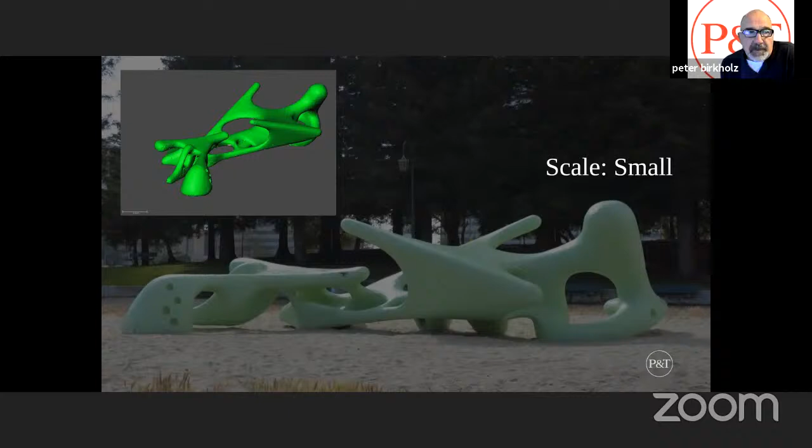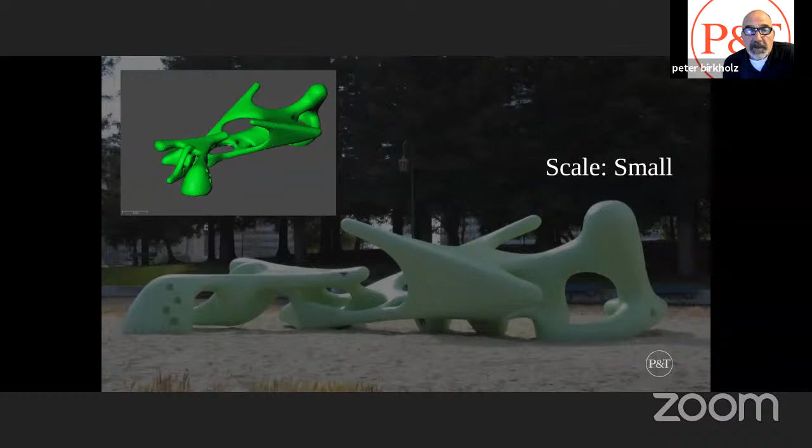scan to BIM. We've done this on small projects, like here's a project in Oakland that the firm did pro bono, a budget of probably like $50,000 to rehabilitate this historic late 1950s children's play structure. And we scanned this to document, and we're going to actually take this scan and output it to do 3D prints that they can use to fundraise for the project. So kind of a unique use of the scanning technology.

On a larger scale, we're part of a team for the California State Capitol. To the left here, you see the rotunda of the California Capitol and the historic West Wing. On the right side of the screen is the annex, which is going to be demolished and rebuilt. We're a partner with SOM on this, and this is a $500 million project, and we're using scanning technology to document the existing building. The addition is a 1950s addition. The original building was built in the beginning of the century.

And in between these two buildings is an interstitial space that we don't really have very good access to. And so one of the things we're using the scanning technology for is to stick cameras up in this interstitial space to scan to determine what the utilities are and what the condition of the facade is.

Page and Turnbull has been using BIM for the last, say, 15 years. And this was an early project, 2007, 2008, that we were working on with another local architect. This is the Exploratorium Museum at Pier 15, and it's the first zero net energy museum in the US. And how we did it back then was, you see to the upper left, the Port of San Francisco owned the property, and they were the designers of this in 1906.

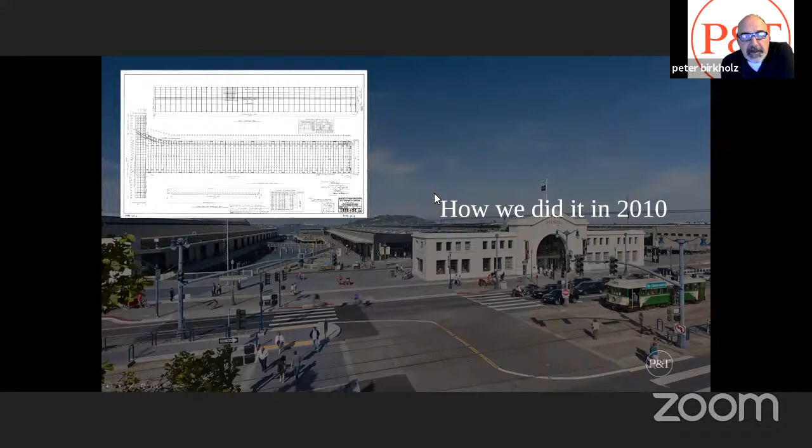The reality is this is all over the place. But because the BIM model was built using just hand interpolation from this, we didn't really have an accurate model. And topping it off, the architect did their model in BIM, produced all the drawings and things. And then when the general contractor came on board, they did their own model. So it was a lot of duplication, a lot of wasted energy. We don't do it that way anymore, which is great.

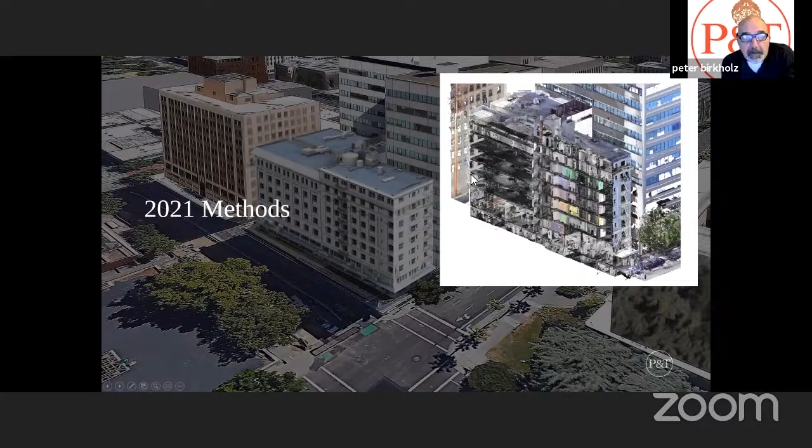What we're doing now is when we get into a project, we outsource the scanning, the photogrammetry, to another group. And here's a project I'm working on that's under construction in Sacramento, the Capitol Park Hotel, built in about 1916. It's kind of interesting: the actual building is this building underneath the 2021 Methods text. And it's actually two hotels. This first portion was built in 1916, and the second portion was built in about 1918. They operated independently as hotels for a number of years, and at some point they were co-joined into a single building.

Unreinforced masonry. One of the issues we have here in California is the high seismicity, earthquake danger. And so we are currently working on this project to rehabilitate it into much needed affordable housing. Again, here's the laser scan that we did for the project. What we found on this project is that often the client doesn't have a lot of upfront money. They get their funding as the project goes. So they want to skimp on the initial civil engineering and other services, the due diligence. And so we were able to, late in the game, get this laser scan.

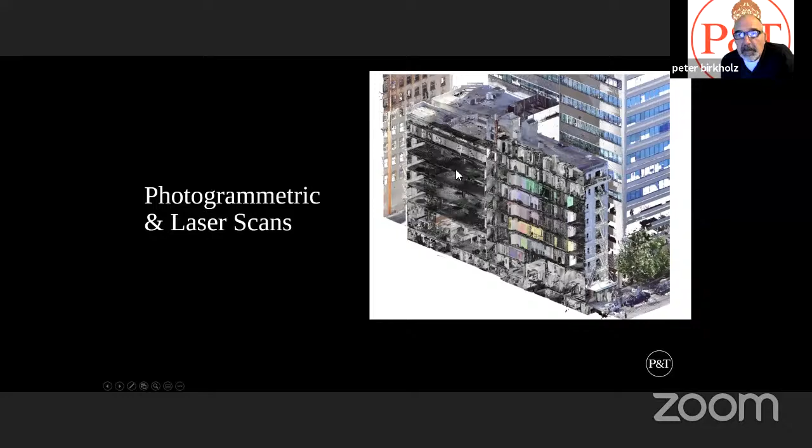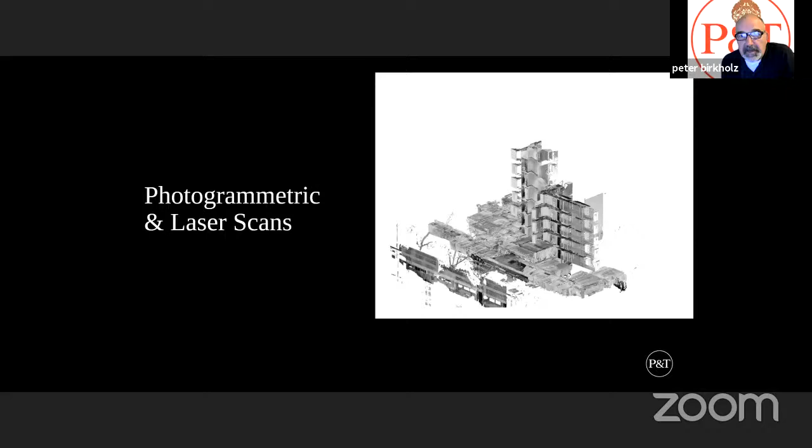But what you'll notice here is this is a cut through of the point cloud on the interior. We documented the lower levels pretty well. We documented some of this south facing area, but we really didn't get into all the floors. We made an assumption that the floors were repetitive going up, and that assumption later came back to bite us. We also scanned the cores separately. This building is a hotel, lots of individual rooms. So to scan it properly, obviously you need to get into every single room and link all those separate scans together. We didn't have the ability to do all that and made some assumptions.

That point cloud was then converted into the BIM, the Revit model that was used by the entire team. And another thing that we found out later was in the BIM conversion. This is a taller 8-story brick masonry building. With brick construction on taller buildings, you start with, say, 6 or 8 withes at the ground floor, and every subsequent floor has one less withe of wall. So by the time you get up to the upper floors, you're looking at perhaps two withes of bricks. The laser scanning obviously can only document what it can see.

So we had interior walls built out that were plaster over some wood framing going up, and it seemed that the walls were consistent going up. But what we later found in the demo phase was that these walls were tapering as they got up, and it caused a lot of unforeseen conditions in construction and added costs, because we later had to come back and properly model it. In addition, there had been lots of renovations over the years, so we also found columns that we didn't know about buried in the wall. So the point is that the scan is only as good as what it can see, and if you have the ability to knock holes in the walls and supplement your scanning with true verified dimensions, or if they're bigger spaces, get that scanner inside, it will aid you greatly.

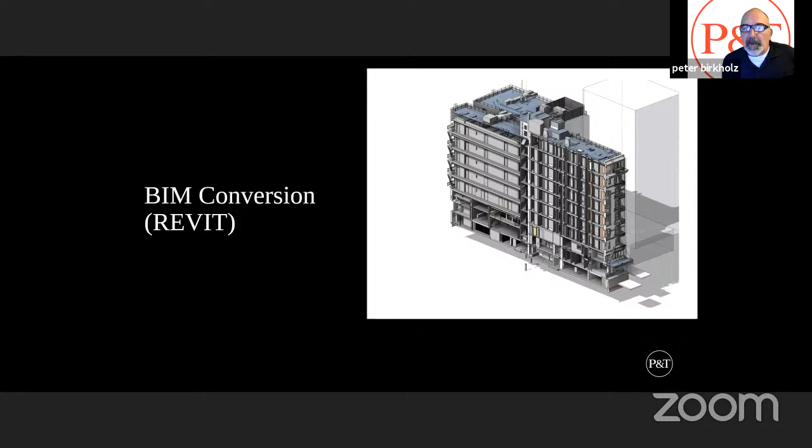So yeah, all I can say is we learned our lessons. Do your scanning early, do lots of scanning, take the extra time to fully document each floor. Don't assume that things are repetitive as they move up.

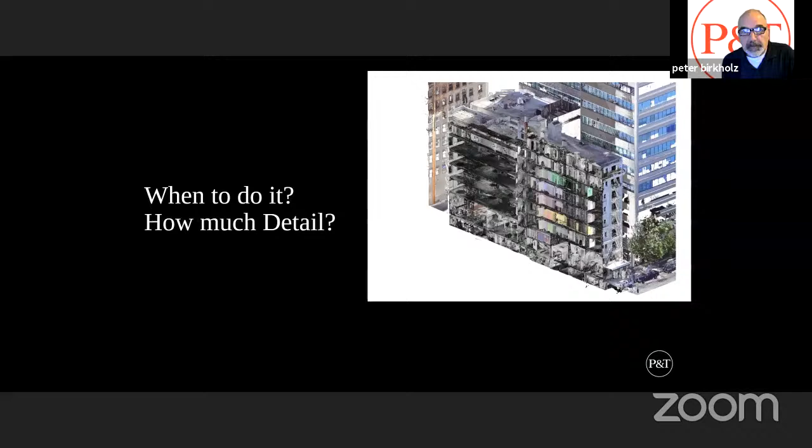Obviously, what are the benefits of doing laser scanning? Our office does a lot of national parks work here in California. So we're in San Francisco, and we're working on something at, say, Death Valley. One of the benefits of having the scan is that once we have that point cloud and the photogrammetry, we're able to sit in our office and basically click on points in the point cloud, and we have a very accurate document that we can measure, so that we don't need to visit the site. We have really accurate information. We don't need to go looking through individual images or looking at our notes from past site visits.

In conclusion, scan it early, get your owners to invest in it up front, scan everything, scan below and scan behind. Don't skimp on the BIM modeling. Truly model everything if you can. I'm not saying model things in 3D, but key elements like walls and structures, make sure you model them, and don't assume things are repetitive.

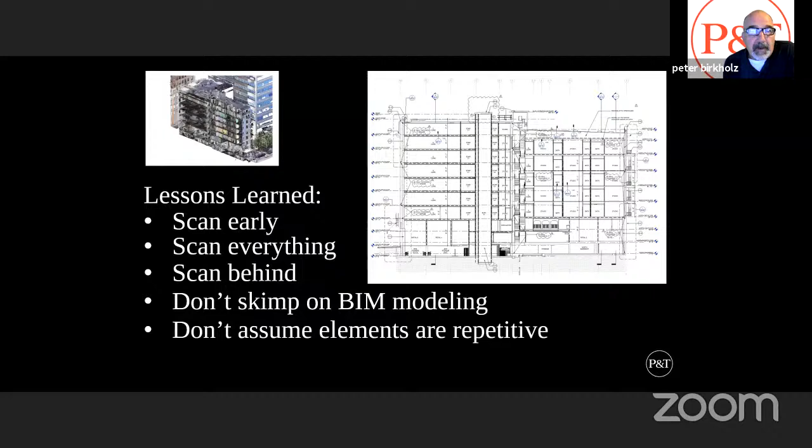Going forward, we're working on the state capitol annex in Sacramento, and when they built that addition onto it in the 50s, they knocked off some of the ornament. There's cast iron ornament on the cornice, etc. We are now going to have that recreated, and our internal team is modeling those elements in a way that they can be outsourced to a CNC machine, so that copies of that ornament can be made in a cost-effective manner. And that's all I had to say.

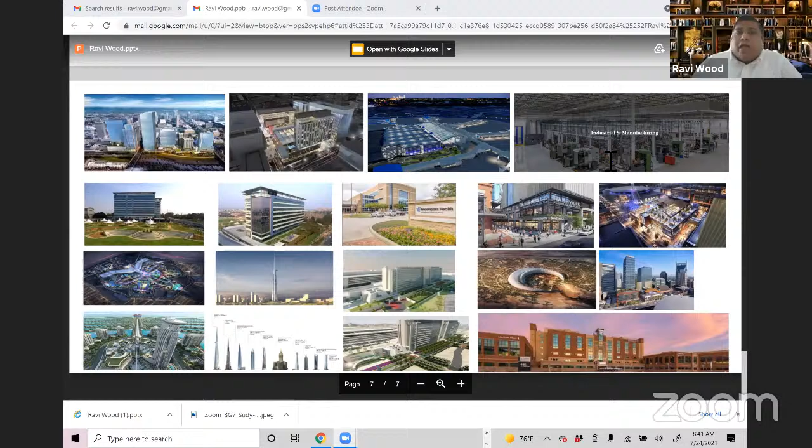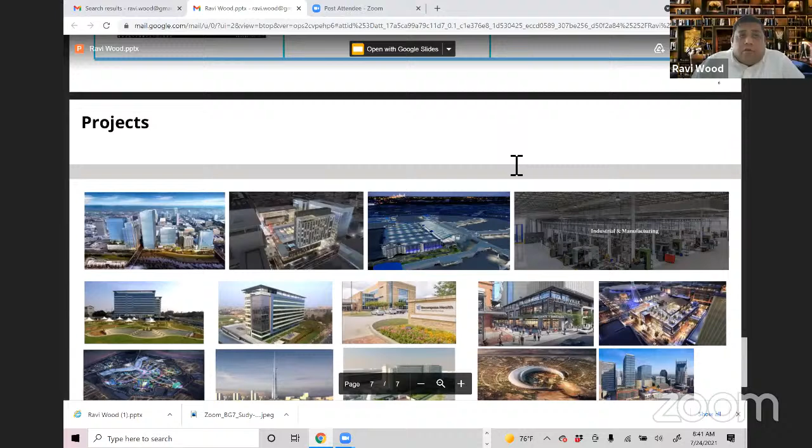So I've traveled across the world. BIM has taken me from a small town boy in India to come to US and be a speaker mentor at AU. So I'm one of the best BIM managers in the world. The world knows it. And let's go not just to the project. What has brought me here is, of course, my friends, my family, and all the things I learned on the way. But before that, there's also a process. We were talking about what happens between the contractors, designers. For me, architecture doesn't stop when we do design development. It's just the starting of a project. So we'll go through a process later on.

The second segment that I want to deal with, it's called the Ravi Process. It is an award-winning presentation at AU in 2019. If somebody wants to learn BIM management at expert level, Autodesk recommends me, not like basic where you're just starting with Revit. If you want to learn the best of the best, you go to Ravi and learn the Ravi process. And before that, we also have the awards that I won in Hong Kong, where I presented New York Build Expo, LA, Canada, CanBIM Council, a lot of places. But before that, I want to highlight two projects and two processes, essentially.

The first one is a NetApp software campus that I did in Bangalore. It was for NetApp. It's a software Fortune 500 company, and they wanted to build a Class A project in India. The struggle was, as Anand mentioned, people are not yet aware of the processes. So we set up the BIM execution plan based on the AIA and UK level 2, and we delivered an LOD 500 model. We not only did design development, we did construction documentation, we did energy analysis, we did LOD 500 asset information model handover. This model is being used for facility management by the client as well.

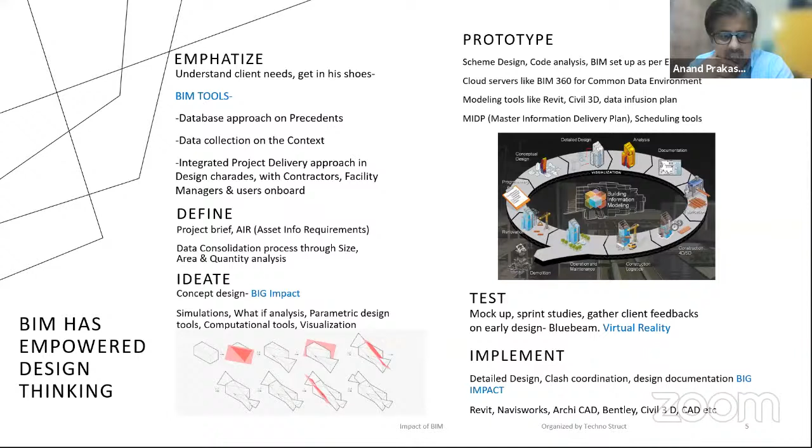So I would say it's a bouquet of all these tools, which can be really utilized depending upon their utility in a certain phase. So that's about how BIM has impacted design thinking. And then, right, data makes us informed, and data that makes sense is information. Right info at the right time is very critical.

It enables agility. And what I mean by agility in a design process is that you should be able to change the course if something comes up, right? If that ability to change the course of your entire process is not being supported by whatever workflow you have designed, then probably you are not helping the project. So here, BIM is also helping us in responding to change management quite effectively.

And the next thing is about certainty in design. The way we are harnessing the potential of BIM is that we are trying to have a lot more accurate information in our designs, much more certainty in design, so that we can get buy-in from the clients and from all the stakeholders as early as possible in the process of design, because no one wants to buy an experiment. Experiments can be really expensive.

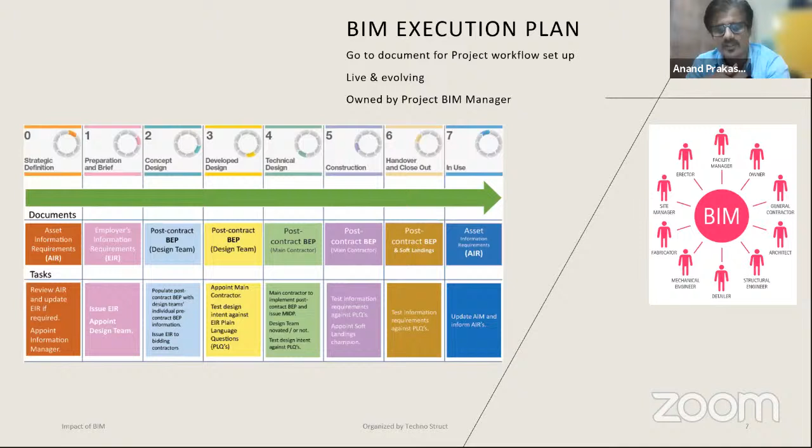As the project changes, there are a lot of changes happening all the time. The clients are coming up with new requirements. If there are 5 phases of a project, 2 phases got held up, 3 phases got started, and 2 new additional components of the project got launched. So these kinds of scenarios do happen, and we are facing them day in, day out. Okay, so going to the next one.

So where are we headed to with BIM? Of course, the journey so far has been quite useful, quite disruptive. At least the big firms, the professionals, they're all sold on BIM. This is the UK BIM Task Group and their plan. So at present, I would say that most of us are still at level 2, right?

And in the 2020s, where we are headed to, you see there are a couple of highlighted items here: one is called the delivery manual, and the other one is called the IFD. So this is where, as BIM professionals, we all are headed. If you can allow me some time, I can quickly explain what these 2 terms mean here.

Sure. Yeah. So the first term that I wanted to talk about was the delivery manual, or information delivery manual. This is really about how the information has to be exchanged. So we are coming up with a protocol which will determine what information has to be exchanged to what stakeholder, at what time, at what stage of the project. This has to be in a very structured way.

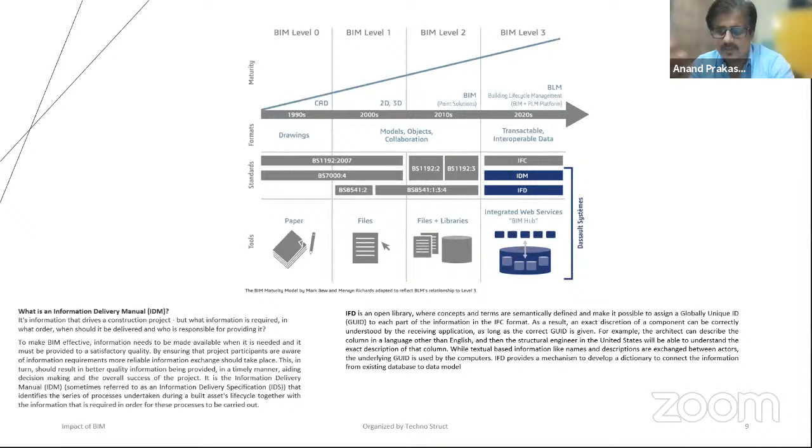The other thing is about how various components in architecture or in a building can interact with each other. You must have heard of machine language. Computers, or the Internet of Things, interact with each other in a certain language, which is called machine language. So likewise, we also have to create a kind of language which happens between

the two building elements. For example, let's say there's a circular column in India, and that same circular column has to be built in the United States. The engineer here would come up with documentation for the erection of that circular column. He will talk about what kind of concrete, what kind of reinforcement, what kind of foundation, what kind of fire rating and all that stuff. Everything will go in. So the entire documentation becomes a little language specific, and there is a challenge of language.

We are also working on some projects where we are facing this linguistic challenge because we work across geographies, at a global scale. So whenever these kinds of situations arise, we are working towards assigning a certain identity to the building components, to the architectural elements, so that we can establish a common information exchange protocol for these kinds of building components.

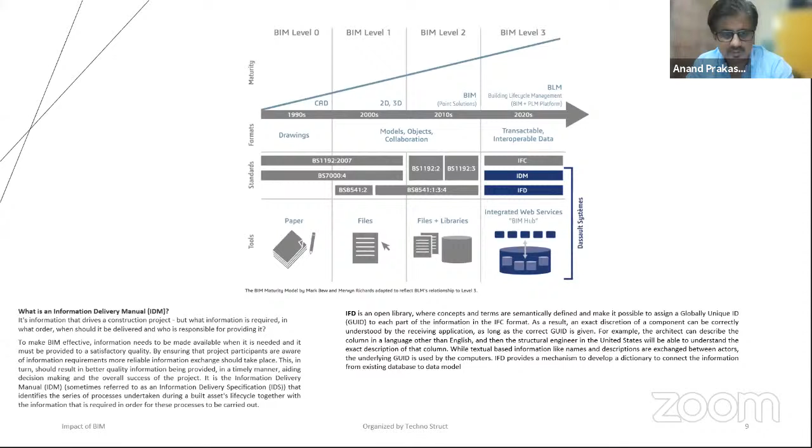So integrated web services will come up with these kinds of linguistic protocols for the building industry, and that's where I think especially the software companies who are developing these tools and apps for our industry are working towards it, and hopefully we'll arrive there quite soon. I think I can close out here.

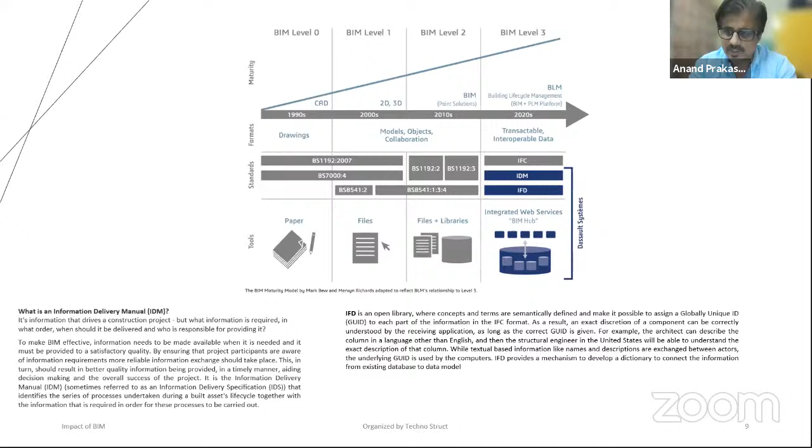Roy? Sure. Yeah. Thank you very much. Let me try and show you guys something cool. I just opened it. While you were talking, when we talk about, let me share a screen. You talked about virtual reality. Can you see my screen? Yep. Okay, perfect.

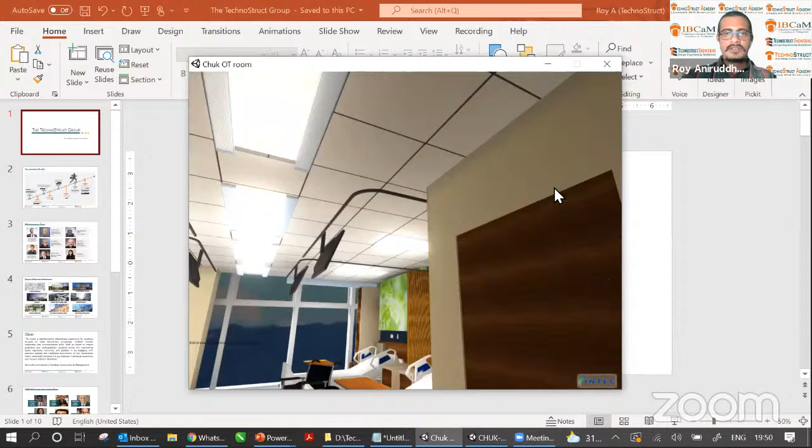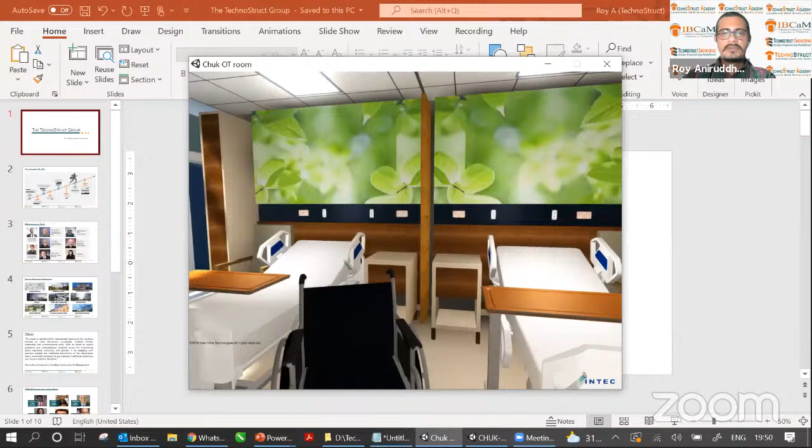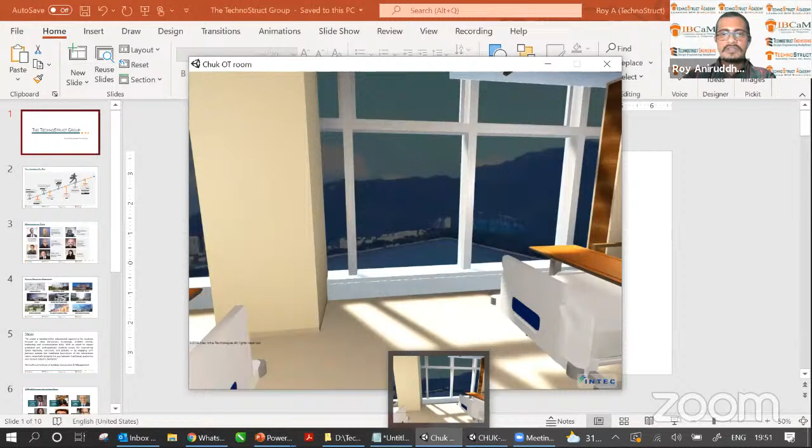Now it's a simple thing, right? We did this for HKS. So what does this do? This is a virtual reality model. This is to scale. This is actually the view from outside. It's not some poster, it's from Google View's actual camera angle. What it does is it helps the doctors plan. For example, if I look at this one, there's an operating theater.

These need to be very accurate in terms of dimensions and specifications, the height of this space. I'm not very good at maneuvering, which you might have guessed. Where this location needs to be, the lux level, all of that needs to be very precise. Where the operator can stand.

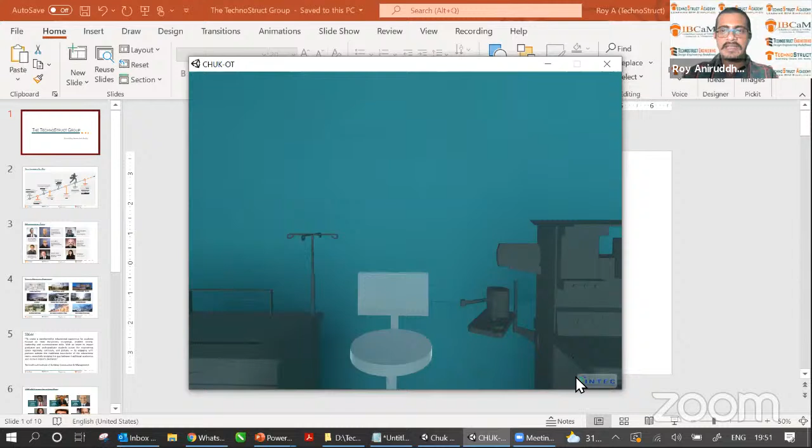When we think of virtual reality, we tend to always think of cool stuff, but the point I'm trying to make is, it's not just about the cool stuff. It's about the functionality. Why are you doing this? When you talked about the BIM execution plan, it's about a set of processes and guidelines to achieve a certain goal in a certain way. What software you use, what specific process you use does not matter. What matters is the end goal, right?

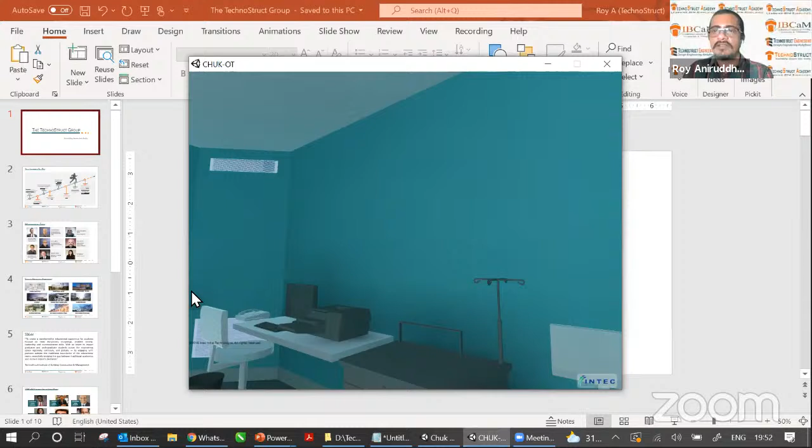So the cool stuff that everyone talks about is the easy stuff. Figuring out the process and the goal is the difficult stuff. I'll show you a project. Again, we have strong confidentiality on this one. If you have guessed the project, please keep it to yourself.

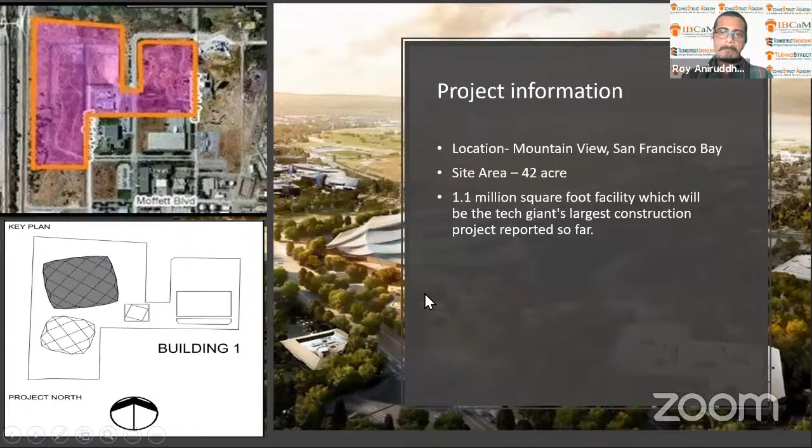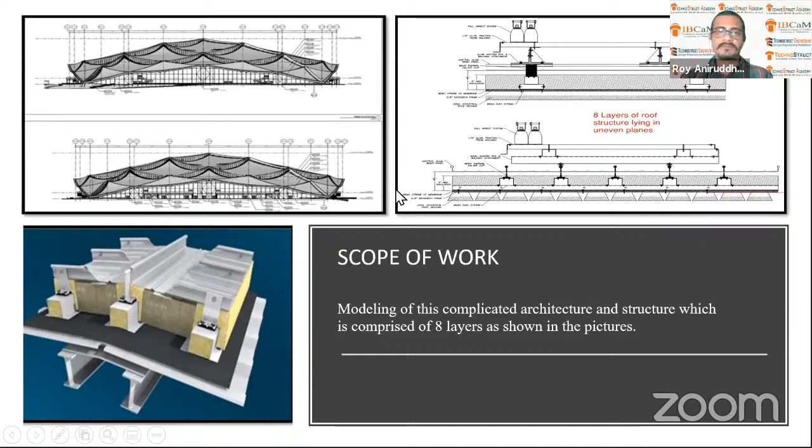This project is in the San Francisco Bay Area, Mountain View. It's a 42-acre site, 1.1 million square foot area. These are the buildings. The scope of work: modeling complicated architecture, structure, 8 layers. So this is the roof structure. All of these vertices are different, and all of these structures lie in uneven planes.

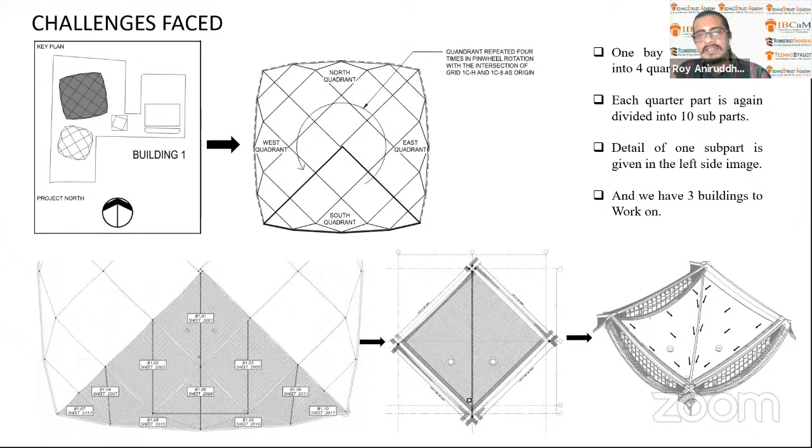Challenges. One bay is first divided into 4 quarter parts. Each quarter part is again divided into 10 subparts. So now you can see all of that. If you're a construction professional, I'm sure you've understood. Now you have to model this individually.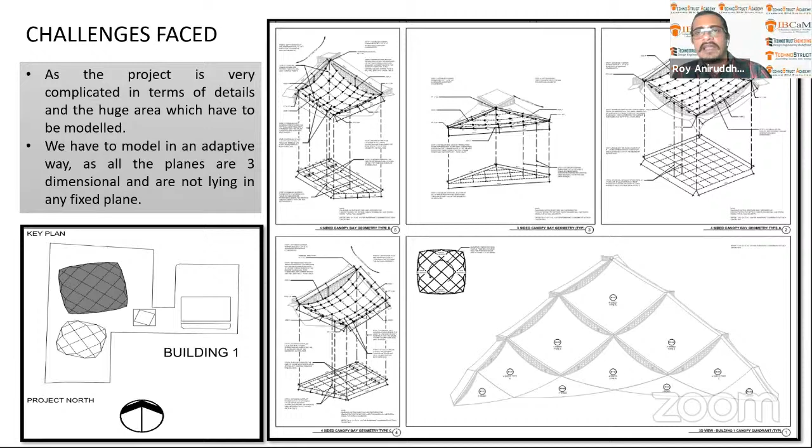Now, here's the tough part. When we started this project, it was 3 years back. 3 years seems like not a very long time, but a lot of the software did not have the maturity level to pull this off, managing so many vertices at the same time. You can see the component.

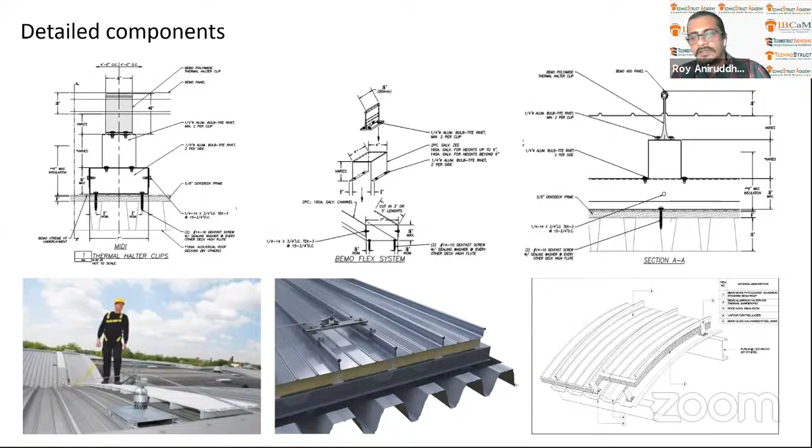We were working as BIM managers on site for the general contractor, which is Whiting Turner. And the roof contractor came up; nobody touched it with a barge pole. None of the BIM companies. We did not want to model. We still do not like doing a lot of modeling as BIM managers.

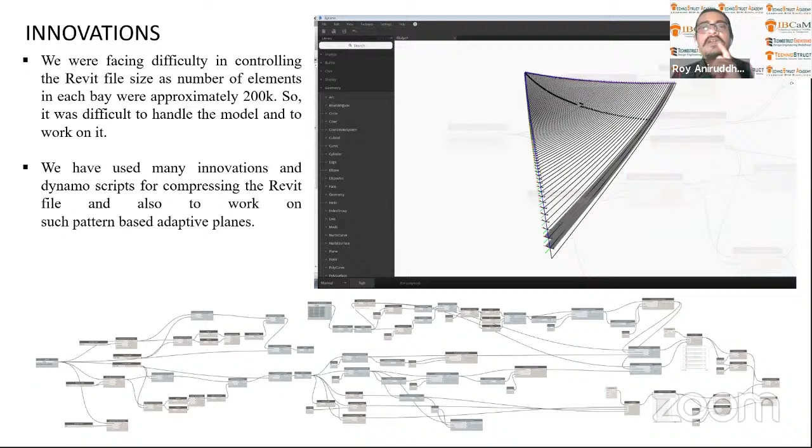And finally, because of pressure, we took it. The challenge was this could still be pulled off in Rhino and then take it to Grasshopper and all of that. But in native Revit, this was a challenge then. This is a challenge now. Okay.

But the client wanted, somebody asked about digital twin. The client wanted a digital twin in Revit. Okay. So we will take the Tekla model for the structure, the primary steel, and put it in Revit and all of that. So what we did was we coded this on Dynamo, and here's the thing: each bay approximately. So there are 200,000 of them. Okay, for the audience in India, that's 2 lakhs.

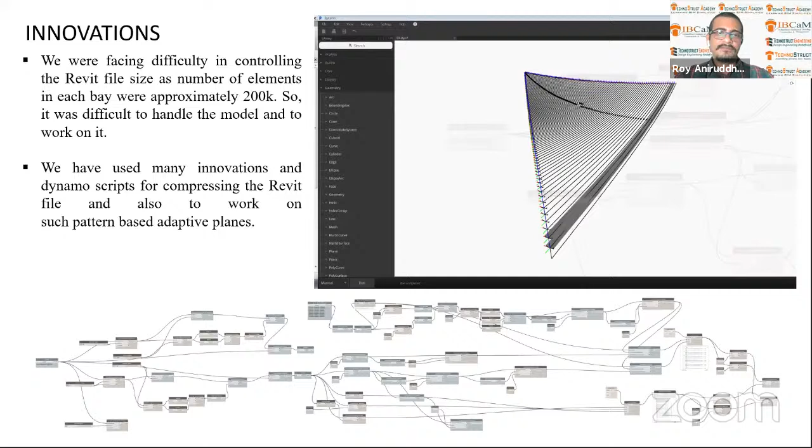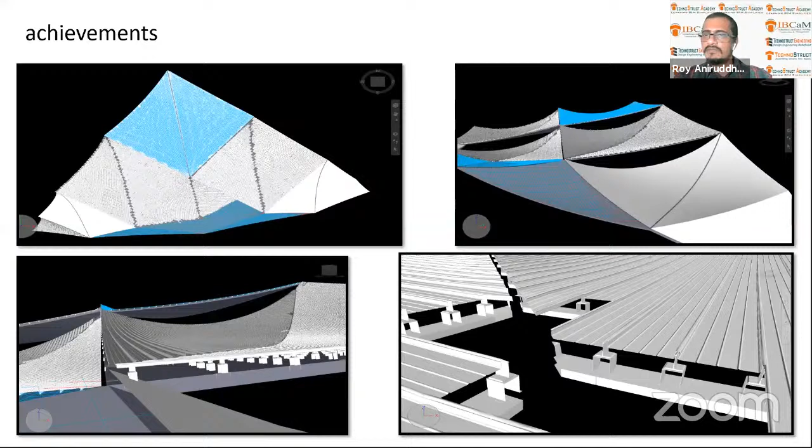So this is what was, and to refresh the model used to take 12 hours to 14 hours and be on the server. So the reason I'm showing this is not to glorify who we are and what we do, but to say that if there is a certain goal, even if there's a software limitation, you will always find a way of doing it. We said this is very easy in Rhino and then putting it in Grasshopper. Client said no. The end client wants this, and they're one of the biggest tech giants in the world. So we have to give this.

And you know how it is, Peter, right? When the client wants something, you have to give it to them. And so that's how it is.

And just so you know, Anand, Ravi, and the audience, 90% of the Dynamo stuff was done by 2 of our staff whom we had hired directly from the institute, Technostruct Academy. Both of them were architects with about 1 year of experience, and they're now senior team leads managing projects themselves. So we pulled it off. And they pulled it off, which is what makes me more proud.

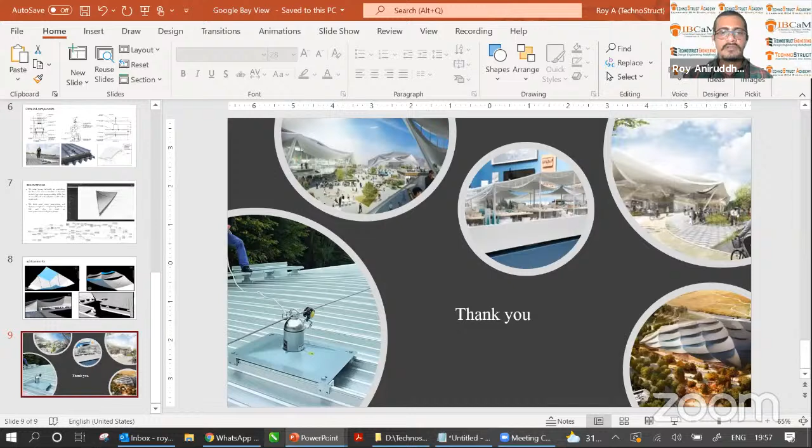Awesome. Really awesome. Working on Dynamo and such young people, really awesome. Incredible. Yeah, that's what I said. When Ravi said there are really talented people. That's why we have our offices in India, because of the R&D we can do. We have really talented architects, engineers.

The problem is everyone in India wants to teach tools. Tools are easy. You can go on YouTube and learn Revit. Not a problem. You have to teach the technology. You have to learn the technology and the processes and the codes. That's how you showed the example of the ship. That's how you stay nimble. Form follows function, or function follows form, and now everything follows a Revit model. No, it doesn't need to be like that. So I want to talk about it.